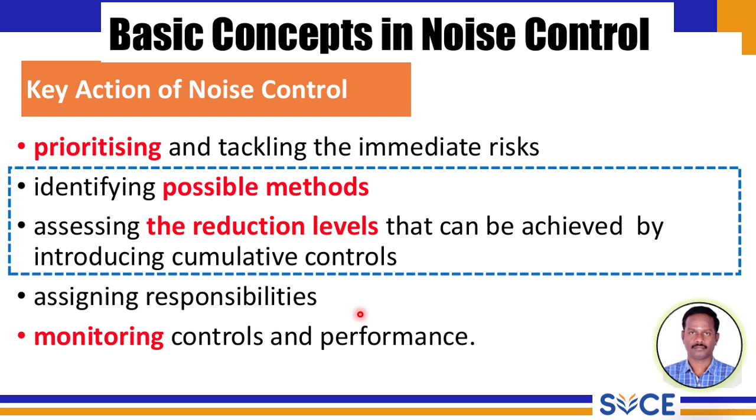Effective noise control also necessitates clearly assigning responsibilities for the implementation and maintenance of these measures. Finally, a vital aspect is monitoring the implemented controls and their ongoing performance to ensure their continued effectiveness.

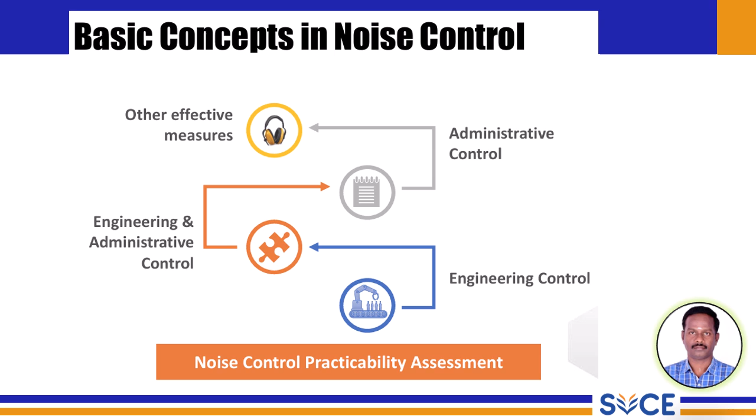When tackling any noise issue, a clear understanding of the problem is paramount. This forms the bedrock of an effective control strategy. To adequately define the noise problem and lay a solid foundation for our control measures, several critical factors must be carefully considered. First, we need to identify the type of noise. Is it continuous, intermittent, impulsive, or perhaps a combination? Different types of noise often require different control approaches.

Next, understanding the noise level and temporal pattern is crucial. How loud is the noise? Does its intensity fluctuate over time or is it constant? Are there specific times when it occurs? This helps us quantify the exposure.

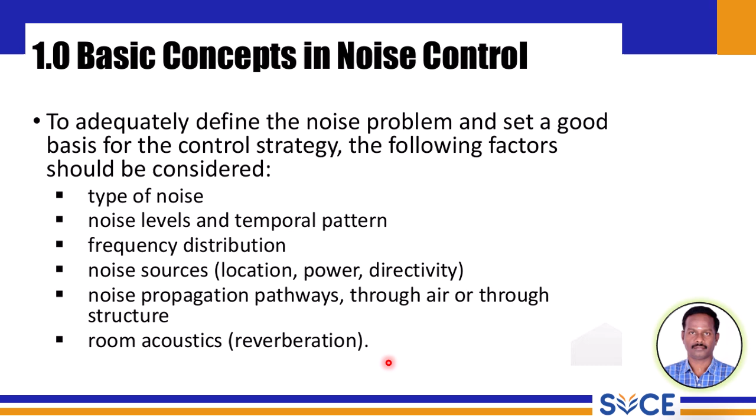Finally, room acoustics, including factors like reverberation, play a significant role. How does the sound behave within the space? A room with hard, reflective surfaces will have more reverberation, potentially amplifying the noise problem, whereas a room with absorptive surfaces can help dampen it.

Common types of engineering controls include absorption, insulation, dampers, silencers, and vibration insulation.

It is critical that specific engineering control measures chosen are assessed for suitability, use, effectiveness, and maintenance requirements of the equipment. If needed, employers should always consult with acoustic experts or noise control suppliers.

If engineering controls are insufficient or not feasible to reduce noise exposure adequately, we move to the next level: administrative control. These measures focus on how work is organized, aiming to reduce either the number of workers exposed to noise or the duration of their exposure. Think of things like changing shift patterns, rotating jobs, or creating quiet areas. Administrative control should be considered when it is not possible to reduce noise exposure sufficiently through engineering means alone.

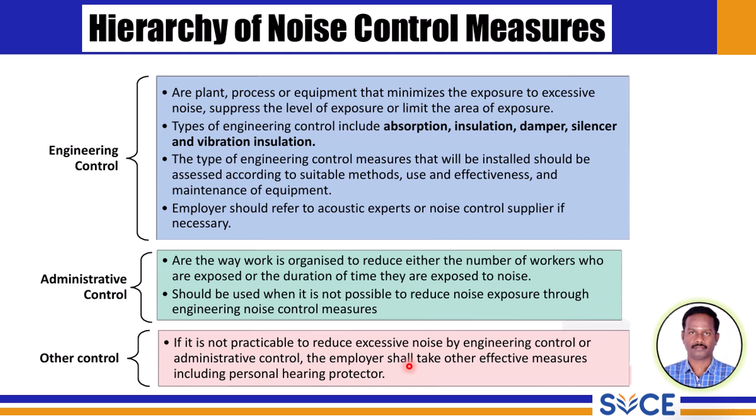Finally, at the end, there are other controls. These come into play if it is not practicable to reduce excessive noise through either engineering or administrative controls. In such situations, the employer must take other effective measures, primarily the use of personal hearing protectors such as earplugs or earmuffs. It is important to remember that relying on personal protective equipment is considered the last line of defense, used when other more robust control measures cannot achieve the desired noise reduction.

We delve into the hierarchy of noise control measures, a prioritized approach to managing noise. We studied engineering control, which is the preferred one. These are modifications to the plant, process, or equipment designed to minimize exposure to excessive noise. The goal is to either suppress the noise at its source, reduce the overall level of exposure, or limit the area affected by the noise.

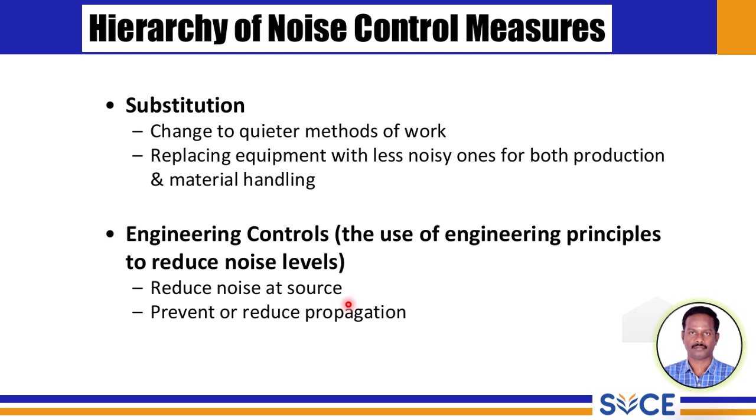In engineering controls, we have the reduction of noise at the source, as we already discussed, like absorbers, silencers, and all those things. And we have to prevent and reduce the propagation.

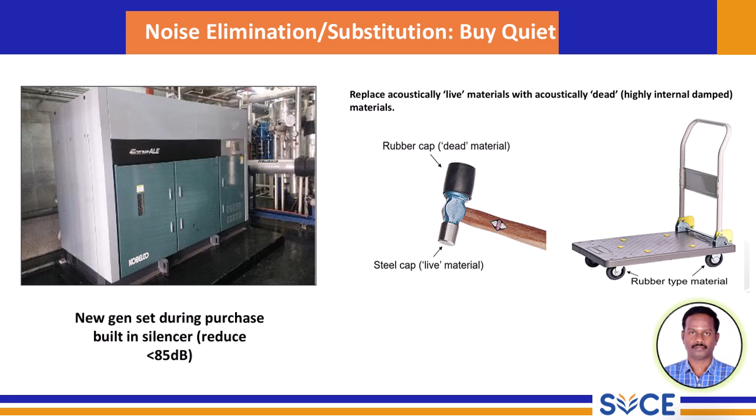When it comes to tackling noise in any environment, a systematic approach is key. Noise control efforts should always follow a well-defined hierarchy of control strategies. This hierarchy progresses: first, we address the source of the noise. If we can't eliminate the noise at its origin, we then look at modifying the path it travels. Finally, as a last resort, we focus on protecting the receiver—that is, individuals exposed to the noise.

The most effective way to reduce noise is to tackle the problem directly at the source. This might involve using quieter machinery, implementing better maintenance practices to reduce vibrations, or even redesigning processes to inherently generate less noise. If controlling the noise at the source is not entirely feasible, the next step is to modify the path the sound takes.

This can involve installing barriers to block sound waves, enclosing noisy equipment to contain the sound, or applying sound absorbent material to reduce reflections and reverberations.

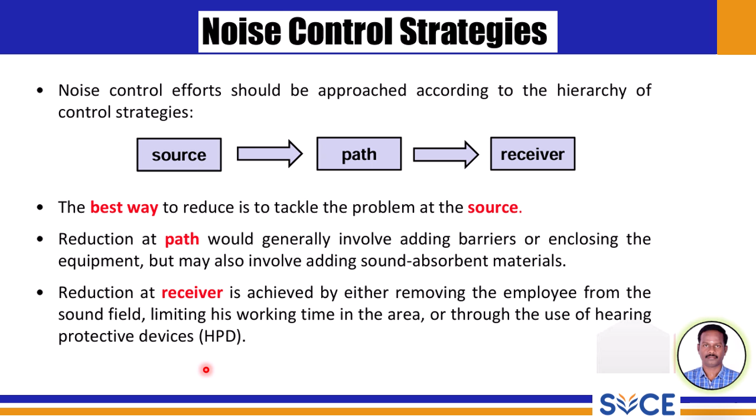We have discussed the hierarchy of noise control: addressing the source, modifying the path, and protecting the receiver. Where the robotic arm represents a potential noise source, notice how sound waves, depicted by these lines, radiate outwards in all directions.

As the sound travels along its path, we have opportunities for intervention. We can see an example of blocking a barrier, which can deflect the direct sound waves. Additionally, absorption can occur as sound waves interact with surfaces, reducing their intensity.

Finally, sound waves reach the receiver. In this case, a person working at a desk. If noise control measures at the source or along the path are insufficient, we must focus on protecting the individual.

At the source, we might modify the equipment to run quietly, redesign the process to eliminate noisy steps, or even relocate the noisy machinery to a less sensitive area.

In the path, to control it, we can use enclosures to contain the sound, apply absorption materials to walls and ceilings to reduce reflections, or block with barriers between sound and the receivers.

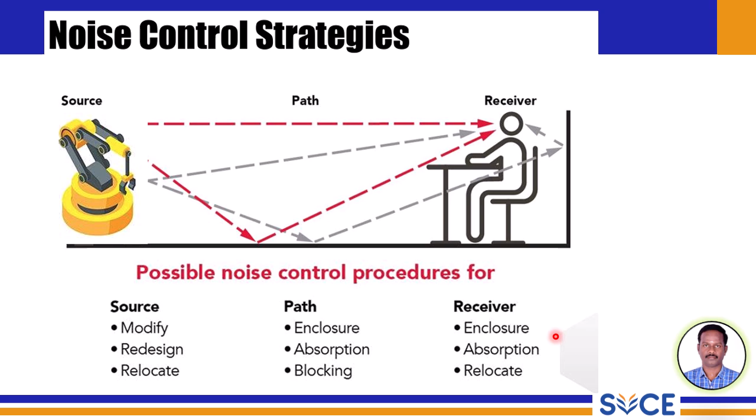And for the receiver, we again consider enclosures, perhaps a quiet workstation. We can use absorption within the workspace to reduce reflected noise. And as a last resort, we might need to relocate the individual to a quieter environment or provide personal hearing protection.

Effective noise control isn't a one-time fix, it is an ongoing process. Here, this cyclic diagram illustrates how to manage and minimize noise in any environment.

The cycle begins with proper design and selection. By carefully choosing equipment and designing workplaces with noise reduction in mind from the outset, we can prevent many noise issues before they arise.

Next comes proper maintenance. Regularly inspecting and maintaining equipment ensures it operates as intended and doesn't generate unnecessary noise due to wear and tear or malfunctions.

Another key strategy is the reduction of impact forces. Many industrial and even everyday noises are generated by impact. Implementing cushioning, dampening materials, or modifying processes to minimize force contact can significantly reduce noise levels.

Vibration damping plays a crucial role in noise control. Vibrations in machinery and structures can radiate as sound. By using damping materials and techniques, we can absorb these vibrations and prevent them from becoming airborne noise.

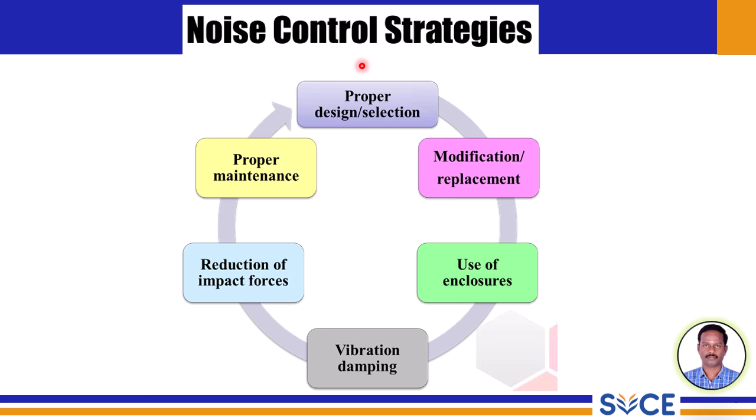This cyclic approach emphasizes that noise control is not static. It requires continuous attention, from the initial design and selection of equipment, through ongoing maintenance, implementing noise reduction techniques, and even considering modification or replacement when necessary.

When tackling noise issues, the most effective and preferred method falls under the umbrella of engineering control, specifically addressing the noise directly at its source.

Implementing engineering control at the source is generally considered the most robust and long-lasting solution. To do this effectively, a thorough understanding of how the machine or process operates is crucial. This knowledge allows us to pinpoint where noise is generated and explore potential solutions at that very point.

One fundamental approach is to entirely eliminate the noisy machine or process if possible. Alternatively, we can replace it with a quieter operation that still achieves the same or better efficiency. These proactive substitutions can drastically reduce noise output.

Another key strategy involves directly replacing noisy machinery with newer equipment specifically designed to operate at significantly lower noise levels. This buy-quiet approach integrates noise reduction into the equipment itself.

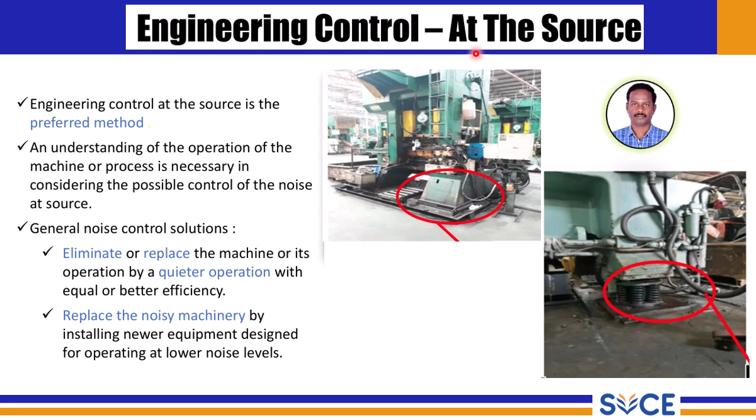We have established that addressing noise at its origin is the most effective strategy. Let's delve into more specific engineering solutions that target the source directly.

One crucial approach involves correcting the specific noise source through minor design changes. Even seemingly small modifications to a machine design can have a significant impact on its noise output.

Maintaining a high standard of plant and equipment maintenance is paramount. Well-maintained machinery operates more smoothly and generates less unwanted noise. Regular checks, lubrication, and timely repairs are essential for noise control.

Instead of viewing the entire machine as a single noise source, it's often more effective to correct the specific machine elements that are the primary cause of the noise. This localized approach allows for a targeted solution.

Another valuable technique is to separate the noisy elements that don't need to be an integral part of the basic machine. By physically isolating these components, we can prevent the noise from propagating throughout the equipment and the surrounding environment.

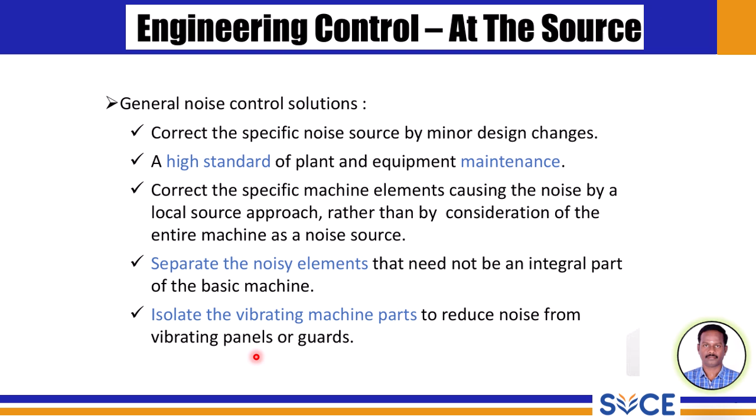Finally, it is very important to isolate vibrating machine parts to minimize noise generated by vibrating panels or guards. Using vibration isolators, dampening materials, or modifying the mounting structure can prevent these vibrations from radiating as audible noise.

We have established that addressing noise at its origin is the most effective strategy. Let's delve into more specific engineering control solutions that target the source directly. One crucial approach involves correcting the specific noise through minor design changes. Even small modifications to a machine design can have a significant impact on noise reduction.

Maintaining a high standard of plant and equipment maintenance is paramount. Well-maintained machinery operates more smoothly and generates less unwanted noise. Regular checks, lubrication, and timely repair are essential for noise control.

Instead of viewing the entire machine as a single noise source, it is often more effective to correct the specific machine elements that are the primary cause of the noise.

Another valuable technique is to separate noisy elements that don't need to be an integral part of the basic machine. By physically isolating these components, we can prevent the noise from propagating throughout the equipment and the surrounding environment.

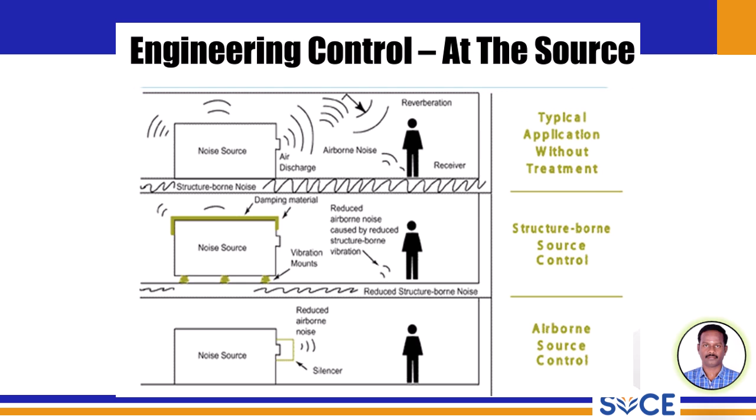Beyond making engineering changes to machinery and its components, another powerful way to control noise is by modifying the processes themselves. Often, the very way a task is performed can significantly impact the amount of noise generated. By carefully examining and adjusting our work processes, we can discover inherently quieter methods.

A key aspect of process modification is to actively seek out and implement alternative techniques that naturally produce less noise. This might involve using different tools, changing the sequence of operations, or adopting entirely new methodologies.

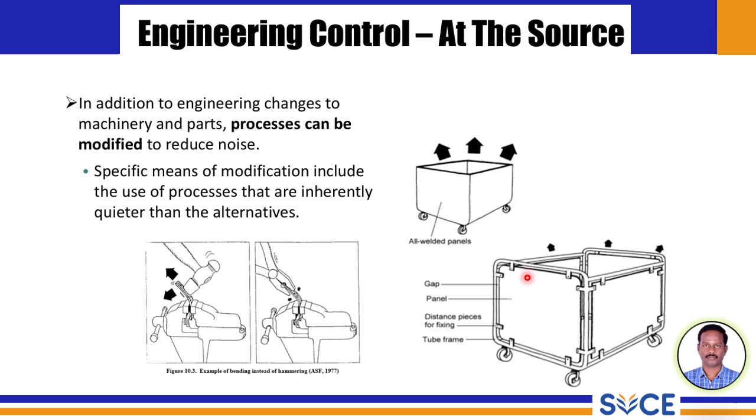Choosing the latter design during the process of material handling can be a form of engineering control at the source.

We have explored modifying the machinery and process. Now consider how engineering control at the source can be applied to material handling also. Material handling processes in particular offer significant opportunities for noise reduction. By carefully analyzing how materials are handled and transported, we can implement changes to minimize impact and shock.

These diagrams illustrate a practical example of engineering control in material handling, both showing a hopper designed to receive materials from a conveyor belt. The top diagram shows a hopper lined with a heavy-duty abrasion-resistant inner skin. While durable, this rigid lining can generate significant noise when materials impact it.

The second diagram showcases a modified design approach, incorporating an impact-absorbing damping construction. Notice the addition of a resilient damping layer beneath the heavy-duty abrasion-resistant inner skin. This extra layer acts as a cushion, absorbing the energy of falling material and significantly reducing the impact noise transmitted to the hopper walls.

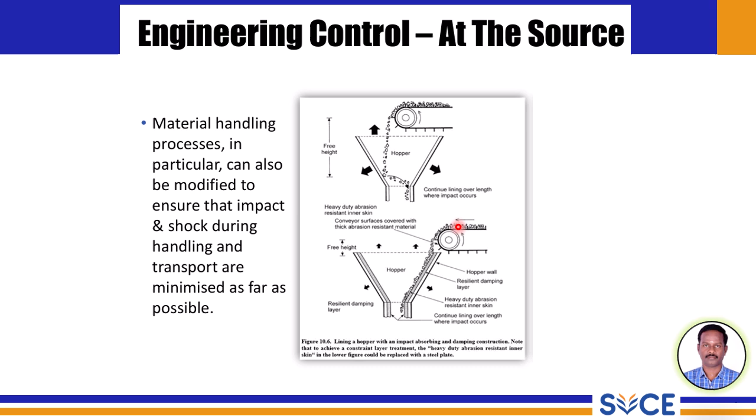Barriers are physical obstructions placed between the noise source and the receiver. This can be walls, partitions, or even strategically placed equipment. The principle is simple: to block the direct path of the sound waves and force them to travel a longer, less direct route, thereby reducing their intensity at the receiver.

Shields are similar to barriers but often more localized and directly associated with the noise source. Think of a machine guard or enclosure that partially or fully surrounds the noisy equipment. Shields aim to contain the sound energy closer to the source and prevent it from radiating freely into the surrounding area.

Absorptive lining involves applying sound-absorbing material to surfaces within the environment, such as walls, ceilings, and even the interior of enclosures.

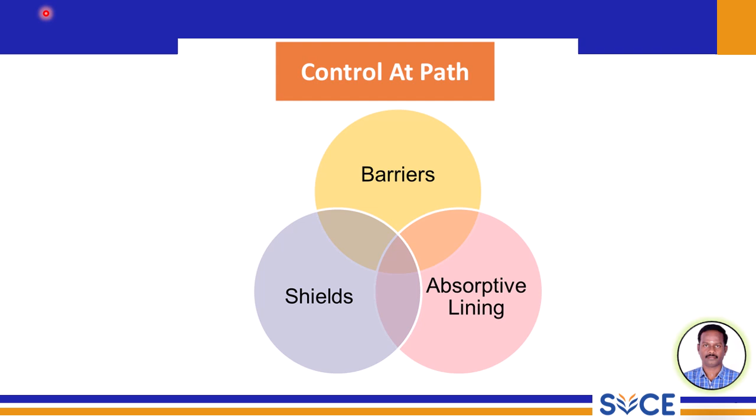Having explored controlling noise at its source, we now turn our attention to engineering control at the transmission path. This involves modifying the environment between the noise source and the receiver to reduce the amount of sound that reaches the listener.

Engineering controls along the noise transmission path include several key strategies. One approach is isolating the noise-emitting object within an enclosure or placing it in a separate room. This physical barrier impedes the direct travel of sound waves.

Another tactic involves building away from the largest number of employees, increasing the distance between the source and the receivers, which naturally reduces the sound intensity.

Further, acoustically treating the area to reduce the noise to the lowest practical level is crucial. This can involve using sound-absorbing materials on walls and ceilings to minimize reflections and reverberations.

Alternately, instead of solely focusing on enclosing the noise source, it may be more practical to protect the employee directly. This can be achieved through the design of a soundproof room or the use of a sound-reducing enclosure for the employees.

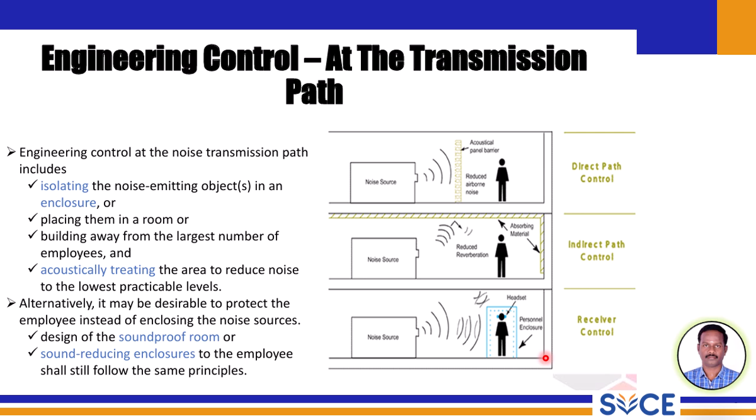Here absorbing material is applied to surfaces, reducing sound reflections and reverberations that would otherwise contribute to the overall noise level. The bottom diagram illustrates receiver control, where a personnel enclosure and headset are used to protect the individual from the noise.

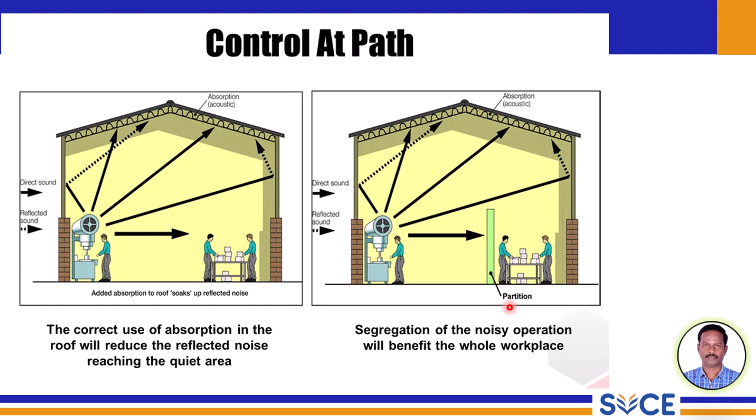The first principle highlights that distance is often the cheapest solution. Simply increasing the distance between the noise source and the receiver can significantly reduce the sound intensity. However, it is important to note that distance alone may not be effective in highly reverberant environments where sound reflects strongly off surfaces.

The next principle emphasizes the use of noise barriers. Erecting a physical barrier between the noise source and receiver can effectively block the direct path of sound.

Once a noise barrier is in place, further treatment may be necessary. This third principle suggests that adding absorbing material to the surfaces of the barrier facing the noise can further enhance its effectiveness by reducing sound reflections off the barrier itself.

When designing walls and machine enclosures for noise control, it is crucial to minimize resonance. Resonance can amplify sound energy at specific frequencies, potentially transmitting noise to the protected area. Therefore, design considerations should aim to avoid or dampen the resonant frequencies.

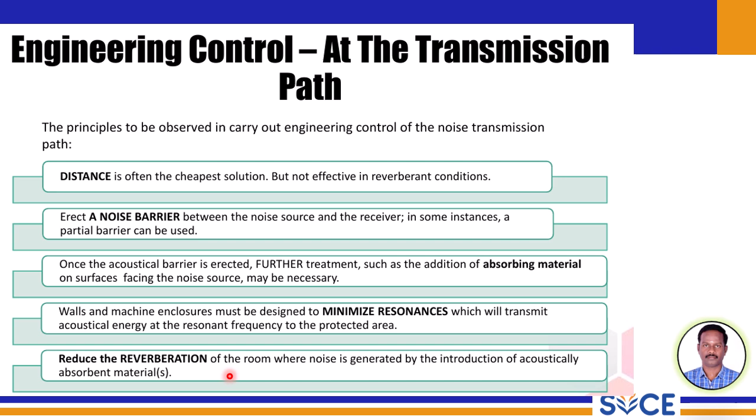Finally, the last principle focuses on the environment where the noise is generated. It advises reducing reverberation of the room by introducing acoustically absorbent material. By minimizing reflections within the source room, we can reduce the overall sound level and the amount of noise transmitted along the path. These principles provide a framework for effectively implementing engineering controls along the noise transmission path.

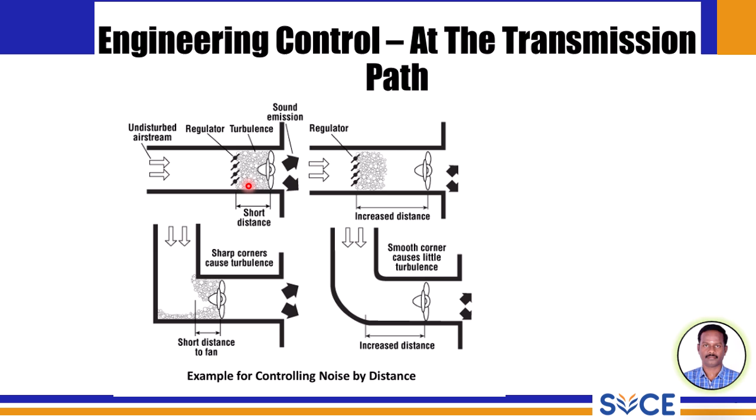These examples specifically show controlling noise by distance and carefully designing the airflow path to reduce turbulence. By strategically increasing the distance sound has to travel and minimizing disruptions in the medium through which it travels, such as air, we can effectively reduce the noise level reaching sensitive areas. These are practical applications of engineering control focused on modifying the transmission path.

Keep in mind that these are approximate ranges, and actual reductions can vary significantly depending on the specific situation and effectiveness of the implemented controls. Addressing the noise directly at the source can typically yield noise reduction in the range of 6 to 8 decibels. While this might seem modest compared to other strategies, reducing noise at the source is often the most fundamental approach and can have a ripple effect, lessening the need for extensive control along the path or at the receiver.

Intervening along the direct path between the source and the receiver, for example by using barriers, can achieve more significant noise reduction ranging from 10 to 25 decibels and potentially even higher depending on the barrier effectiveness. Finally, implementing control at the receiver, such as soundproof enclosures or personal hearing protection, can also provide substantial noise reduction, again in the range of 10 to 25 decibels.